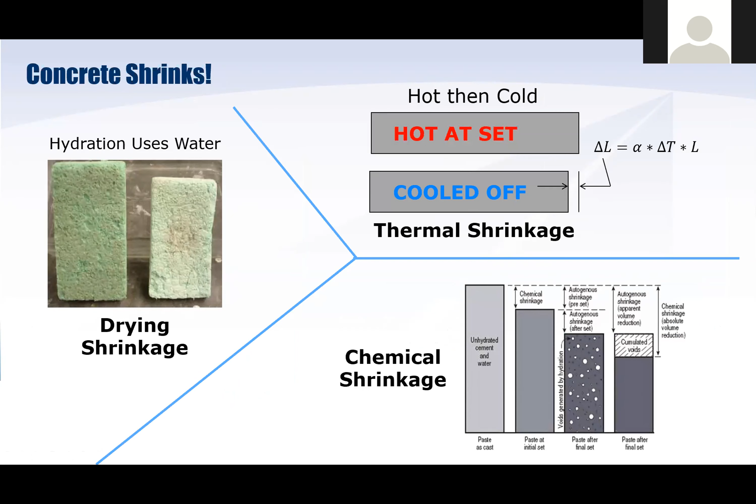So with that, we'll jump right in and talk a little bit about why we joint concrete. Why do we joint concrete pavements? The biggest reason, the one that's most prevalent and comes to mind most often, is that the concrete shrinks. So when we place concrete, through a few different mechanisms—whether it be drying shrinkage, thermal shrinkage, or chemical shrinkage—the concrete wants to shrink. And shrinkage itself is not the problem.

So if we had our fresh, hot, moist concrete, as it begins to cure and harden, it wants to shrink. Now if we were placing concrete on something frictionless, it wouldn't be a problem, but we place our pavements on a subgrade and subbase, and that provides restraint. That restraint wants to stop the pavement from shrinking, and as it builds, it builds stresses within our pavement, and the concrete wants to crack to relieve that stress.

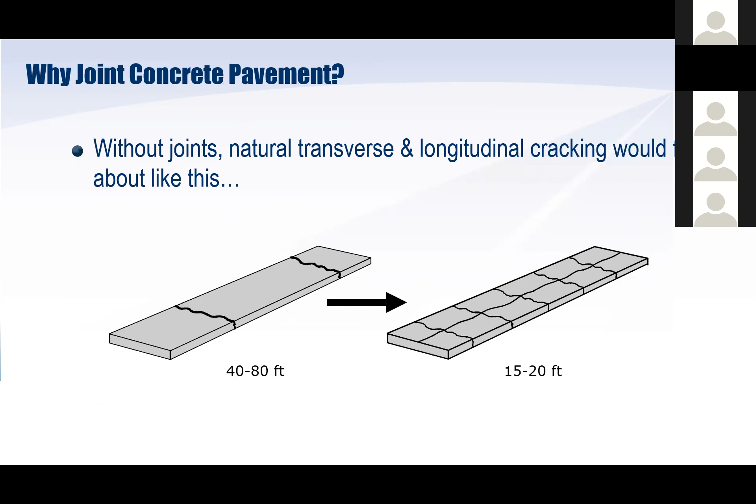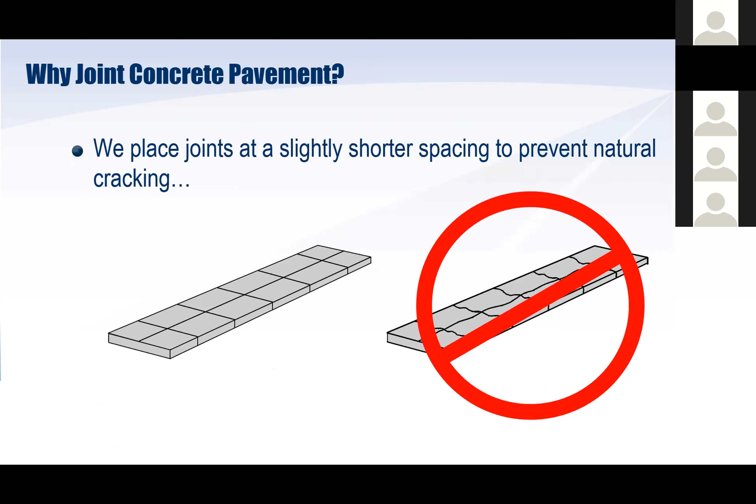If we didn't do any type of jointing, over time we would get a crack every about 40 to 80 feet in a transverse direction, and that would progress down to about every 15 to 20 feet over time. Since cracks are things we see and think our pavement has failed, when really they're just a natural thing that happens, we want to provide a place for that crack to happen that's easier to maintain.

That's one of the biggest reasons why we joint our pavements. Now some other reasons: we want to be able to divide these pavements into constructible lanes. If we were paving, say, 48 or 50 feet wide, it's hard to find a paving machine that could do something that wide in one pass. So we would want to pave 2 lanes at a time and then come back and put a shoulder on, likely in multiple passes. We have to divide the pavement into construction lanes and increments.

Additionally, we have to accommodate slab movements. Once those cracks initiate, the slab is going to continue to expand and contract through the life of the pavement, with thermal cycles and moisture cycles. It's going to keep expanding and contracting, and that's normal. Additionally, those slabs are going to curl and warp - we're going to talk about that in just a few minutes - and we have to accommodate that and decrease the stresses associated with it.

Additionally, we have to know where to put load transfer devices. If we're going to have significant truck traffic, we want a smooth pavement, so we're likely going to need dowel bars within our pavement. Mark's going to talk about dowel bars in a bit, but we need to know where those go, so that's why we have to know where those joints are placed. And if we're sealing our joints, we have to know where that seal needs to go, so we have to provide that sealant reservoir as well.

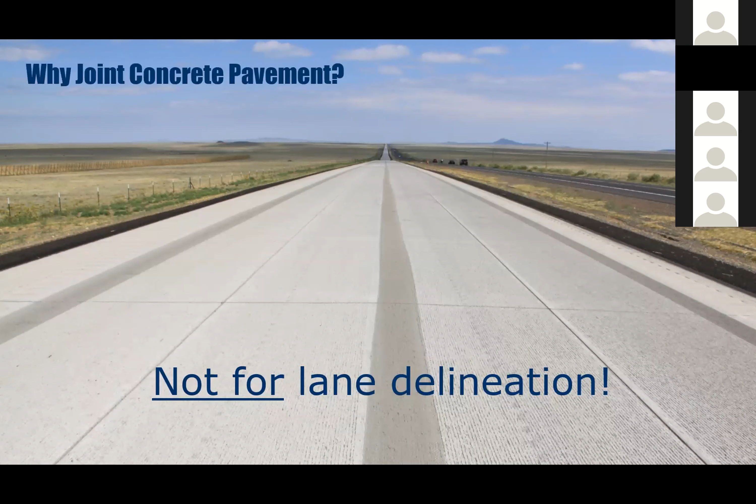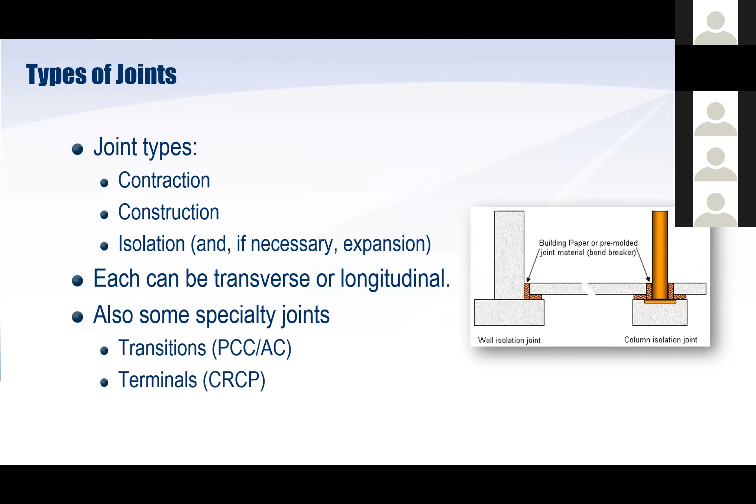Okay, so let's talk about the different types of joints in our concrete pavement. The main types that make up about 95 to 98% of our concrete pavement joints are contraction joints, construction joints, and isolation joints. Those three really make up most of our concrete pavement joints. All of those can happen in the transverse and longitudinal direction, and they're very important to consider. We also have some specialty joints, mainly transitions from concrete to asphalt, or concrete to a bridge, or a terminal joint at the end of a concrete section.

So we'll talk about each of these fairly briefly. First are our contraction joints.

Our contraction joints in the transverse direction are typical sawed joints. When paving a long tangent section, we have to saw in our transverse joints to cut down to about a 15-foot joint spacing range. These can either be doweled or undoweled, where we have aggregate interlock. The dowel provides long-term load transfer, while aggregate interlock may be okay if we don't have a whole lot of truck traffic.

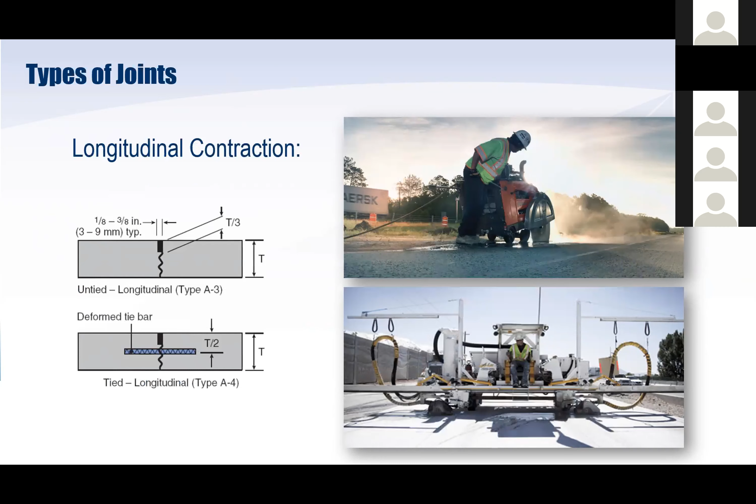Similarly, we can have a contraction joint or sawed joint in the longitudinal direction as well. If we're paving, say, 24 feet wide, we would likely want to cut that down to about 12 feet wide. So we would saw a joint in there, a longitudinal contraction joint, and these can have a tie bar or they can be untied, as you can see here.

The next type of joint is our construction joint. You can see a few different examples of these, but our construction joints typically have a flat face to them, and there are a few different ways that we can do this.

Our construction joints are almost always going to have a dowel bar in there, because we don't have aggregate interlock to transfer load from one slab to the next. So we almost always have a dowel bar as a mechanical load transfer device within our pavement. Occasionally you'll see a tie bar section in there, but a lot more often we'll see a doweled section or a dowel bar at these types of joints.

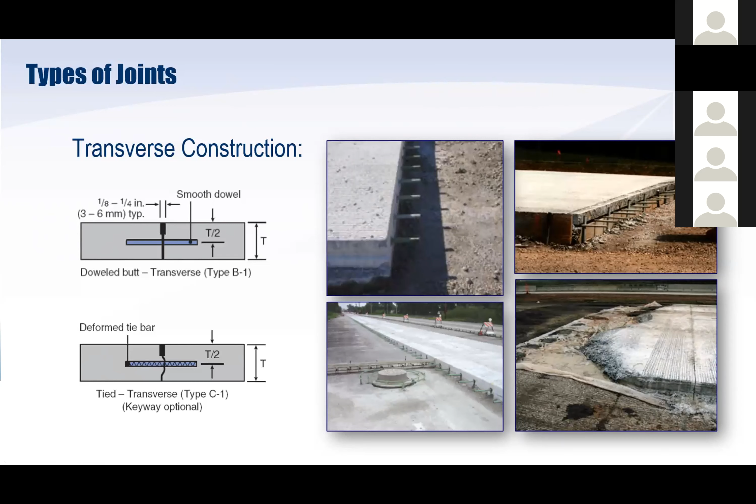There are a number of different ways we can do these header sections or transverse construction joints. You can see here where we're doing a fair bit of handwork, where we're actually doing a formed header. You can see we've already got our dowel bars in place, and they're doing a lot of handwork to get that formed header going.

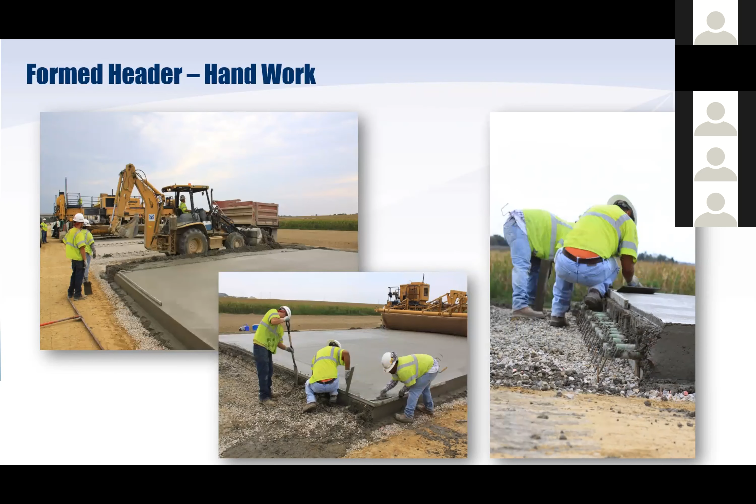Now, these happen at the end of a day's placement, where we're finishing off for a day, and we're going to start the next day's paving right there, right at that header. So there, you can see what a formed header looks like.

For a formed header, there are a few different ways you can do the dowel bars. You can have them already in place, as we saw there, or we can have dummy dowels or false dowels, where we would slide the dowel bar into a slot that's already created to make sure we have good consolidation around that dowel bar. This usually requires a fair bit of handwork as well.

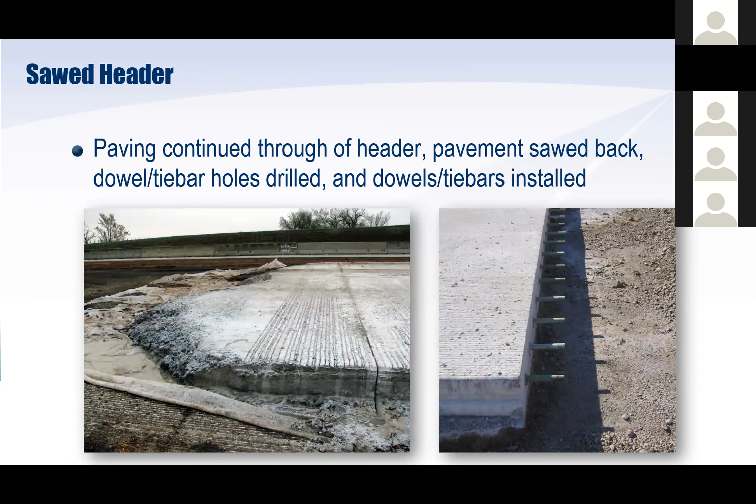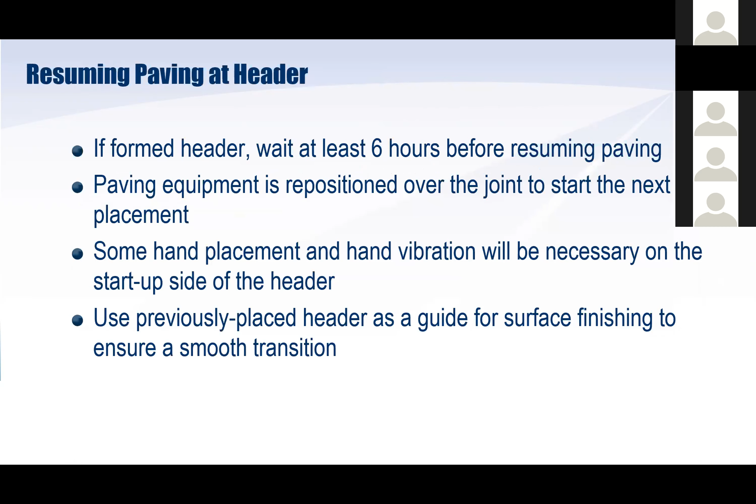Now, when we resume paving at these transverse construction joints or headers, we want to make sure we wait at least 6 hours, so that existing section has time to set. When we're ready to start on the other side, we'll have some handwork to do when we start that section up, making sure we get good vibration so we consolidate our concrete on that leave end of the construction joint. So it takes a little bit of work, but they do perform pretty well.

So our next type of joint is our longitudinal construction joint. These types of joints happen in between paving lanes. So we pave one section of concrete, and then we have to come in and pave the section just adjacent to it. Most often, we're going to see that these sections will be tied together with a tie bar. The tie bar is really just there to make sure that joint doesn't open up and keep these two sections of concrete together.

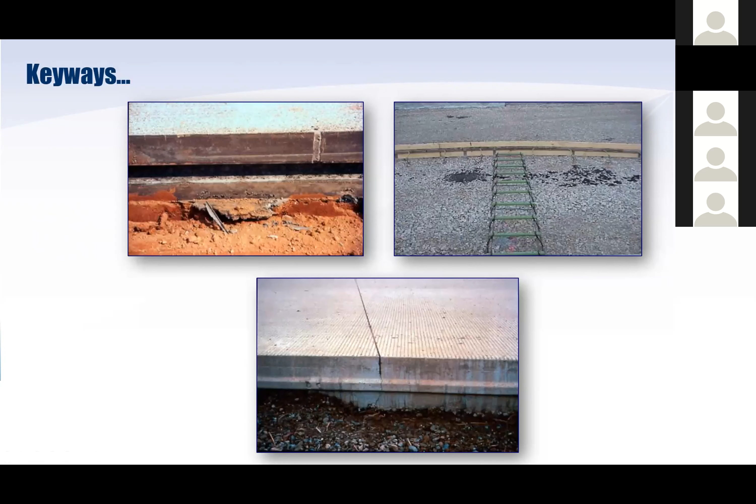Now, one thing with our longitudinal construction joints that I always like to mention is the use of keyways. Keyways are this idea where we have one section of concrete in a paving lane that fits into another and provides a smooth load transfer from one section to the next. However, with these conventional keyways, we've seen it's a relatively high risk of bad construction, where it can be kind of hard to consolidate that concrete in those sections that jut out a little bit. It can happen on both sides of that keyway. So we don't really recommend this conventional type of keyway much anymore.

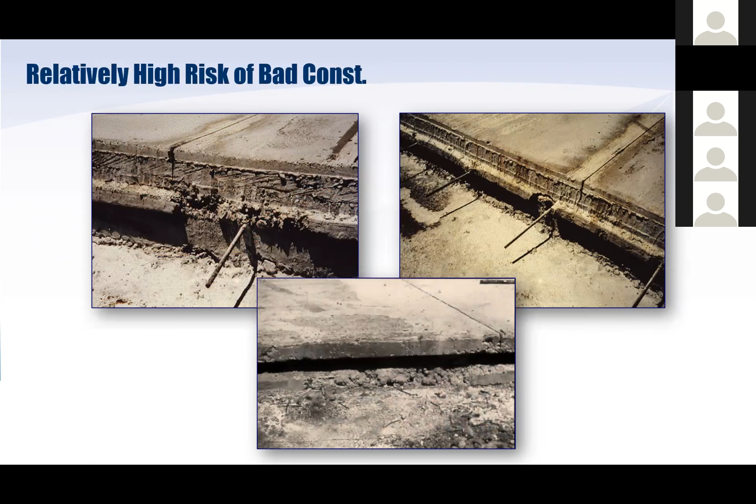Additionally, even if it is constructed properly, we can see that this section here and this section here can actually shear off, and then you get a little gap in between your two sections of concrete. So we don't really recommend this type of keyway anymore. There is a new type of keyway that's more of a sinusoidal section, but it hasn't really caught on in the US. So just a mention of that.

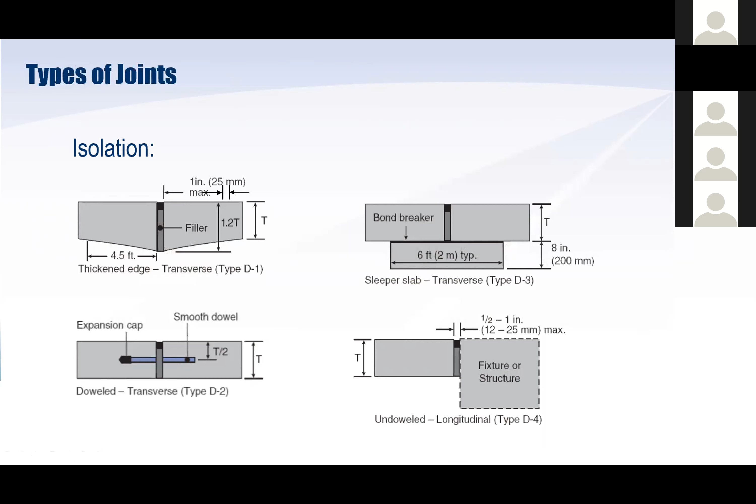Our last type of joint is an isolation joint. And an isolation joint is exactly what it sounds like—we're trying to isolate one section from another. We can do that a few different ways: we have a sleeper slab section, a thickened edge section, and then a doweled isolation, or in this case, it could be called an expansion joint. The idea is to make sure that one section of concrete is not influencing another, or if we're paving up against a structure or any type of drainage facility, this will make sure those two don't interact either in a horizontal or vertical direction—make sure we're not influencing our pavement, and our pavement isn't influencing that structure. You can see what that isolation joint looks like over here. It's usually about a half-inch or half-inch to one-inch filler board to isolate the two sections.

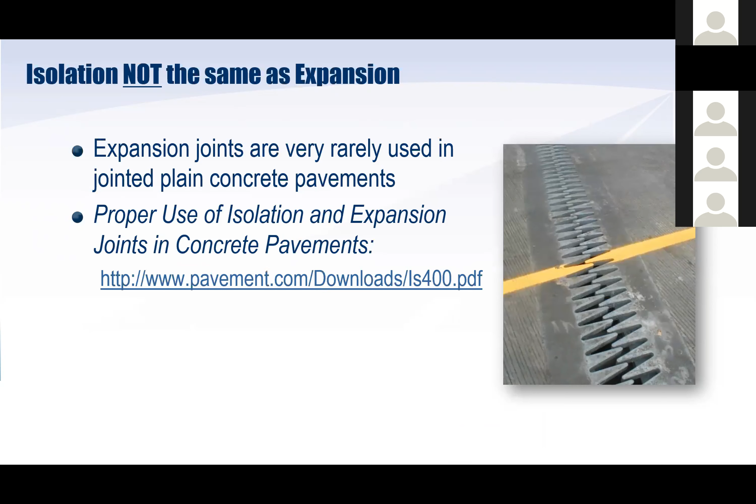Now, most often when we talk about isolation joints, we're not talking about the same thing as an expansion joint. Expansion joints are really more used on bridge sections. So there is a document that talks about the differences between isolation and expansion joints and when they're appropriate. That's another free resource as well.

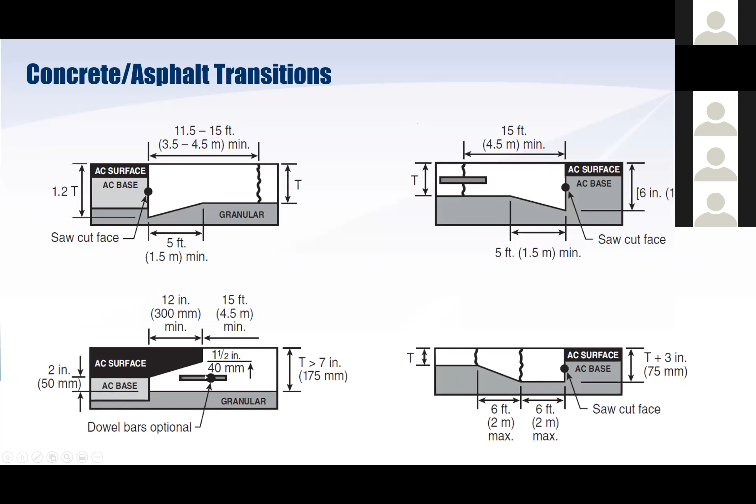So our last types of joints are those specialty joints. Really the main ones you would encounter are the transitions from concrete to asphalt, and you can see what a few of those look like here. Most often we're going to use some sort of thickened edge to firm up that free edge of concrete and reduce the stresses there, making sure we get a smooth transition from our concrete to our asphalt. You can see a few different options for that. Here we've actually got the concrete extending underneath the asphalt with a dowel bar there to help transfer the load and have that smooth transition from concrete to asphalt. If we do it well and construct it well, we can get a nice transition from that asphalt to the concrete section that can last a long time.

Okay, so that's a little bit on our types of joints. Next thing we got to talk about real quick is our panel length, our aspect ratio—what's that maximum joint spacing that we want to think about when we start getting into our joint layout for our concrete pavement?

When we start thinking about maximum joint spacing, the thing we always want to consider is curling and warping, because these slabs are going to have that curling and warping stress from the moisture, from the heat. All of that's going to influence the stresses in our pavement.

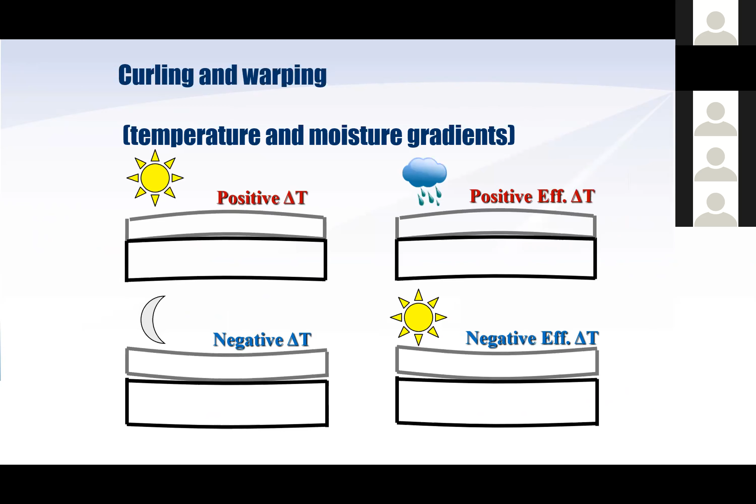We can control that when we control the size of the slabs that we have. By reducing the size of our slabs, we can reduce those stresses and control how they're going to impact our pavement's performance. You can see here a good introduction of what happens when we start cutting our panels in half, basically.

This is something we do a lot more in concrete overlays, where we go to shorter and shorter joint spacing, down all the way to 6-foot panels. But really the idea is consistent, that if we can control the size of our slab, we can control these curling and warping stresses.

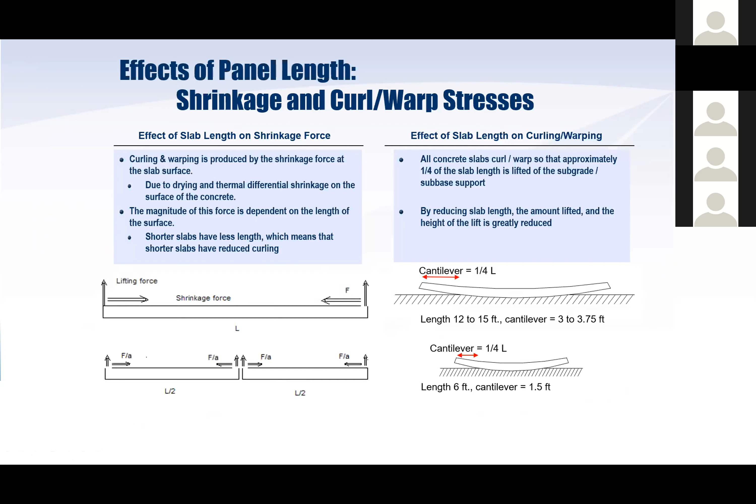So on overlays, when we cut these slabs shorter and shorter, and we have, say, 6-foot by 6-foot joint spacings, you can see we get one load on each slab. It can perform pretty well. We see it work really well on overlays. In some countries in the world, they actually use this on new construction as well.

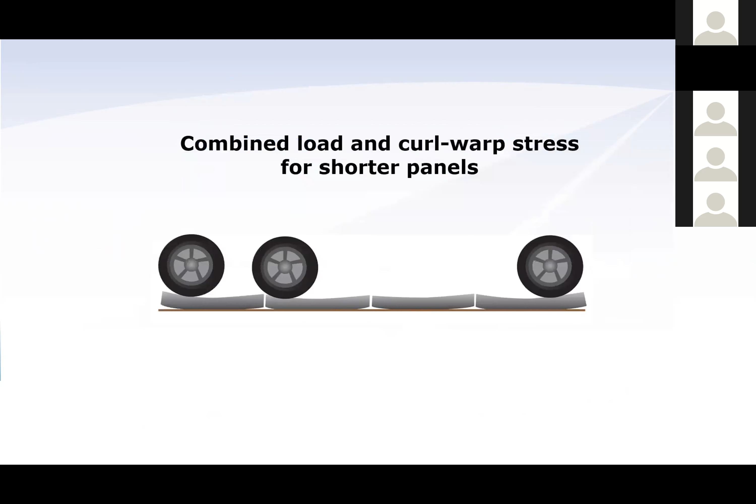That's one of the biggest ways that we control the stresses and the cracking within our pavement, by controlling the joint spacing of our concrete. So we want to consider that when we're thinking about what our joint spacing should actually be. Pavement ME, or Mechanistic Empirical Pavement Design Guide, is a great tool for seeing how that influences pavement performance over time.

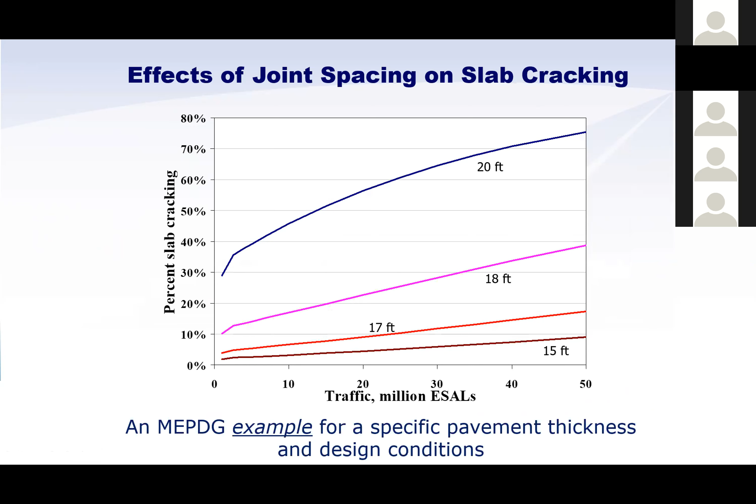We're going to cap that at 15 feet. We don't really want to go beyond 15-foot joint spacings. This should be illustrated by that graph we just saw a couple slides ago.

Additionally, we want to maintain an aspect ratio less than 1.5, which means that if we had a 12-foot wide slab, we definitely wouldn't want to go beyond 18 feet in the transverse direction. Considering that, if we had a thinner slab, say 10-foot wide, we wouldn't want to go beyond 15 feet. Keep that in mind, especially as we go through joint layout for intersections where we may get some odd shaped panels.

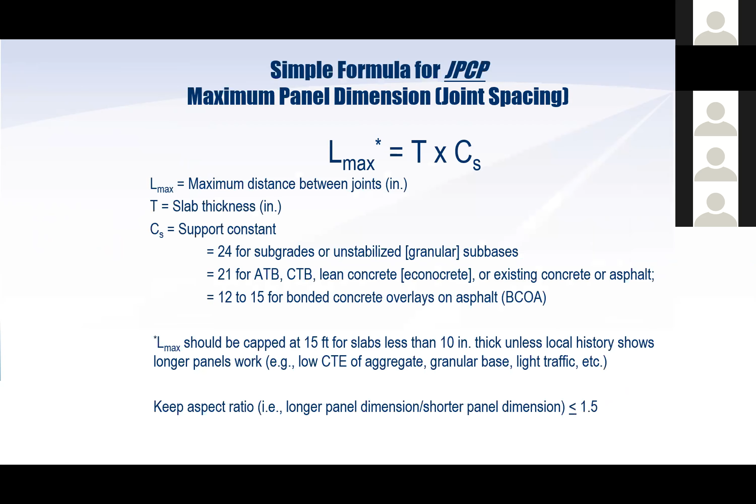Now there is an app for that equation. If you don't want to remember the support constants, this is a free tool from ACPA. You can find it on apps.acpa.org. It's the maximum joint spacing calculator. You basically just provide the thickness of your concrete and then choose what type of support system you have underneath the concrete. It'll give you your recommended maximum joint spacing.

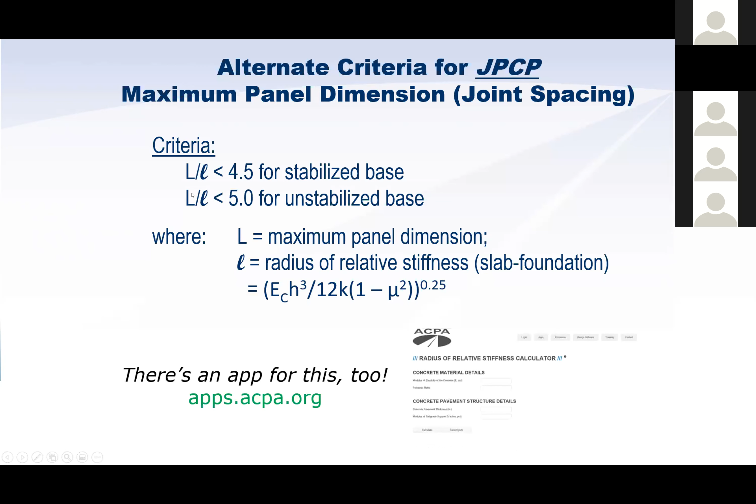Another way to do this that's been used before is by considering the ratio of the maximum joint spacing to the radius of relative stiffness, which is kind of defining your slab foundation. By limiting this ratio of joint spacing to radius of relative stiffness, you come up with similar numbers, but it's a little more mechanistic than that empirical approach we saw on the previous slide. There's another tool that can help with this as well: the radius of relative stiffness calculator. It'll calculate this little l for you, and then you can calculate your big L, or maximum joint spacing, based off of these relationships.

Now that we know our types of joints and a little bit on our aspect ratio and our layout considerations, we can go into joint layout for intersections. This is where we spend a lot of our time talking when we're thinking about jointing concrete pavements, because our geometries start to get a little funky and we have some odd shaped panels that we have to deal with as best we can. That's what we're going to try to do here in the next 10 minutes.

The things to consider for intersections: we want to consider the thickness of both roadways as we approach, we'll see that in just a second. We want to consider the jointing spacing, which we just talked about with our aspect ratio and maximum joint spacing. We want to consider the layout, which is what this methodology is really built for. But we also want to consider maintaining traffic. We're going to phase this intersection and try to maintain traffic and construct the intersection under traffic. We need to consider that up front as designers such that it's actually constructible. And then there are a few other considerations as well.

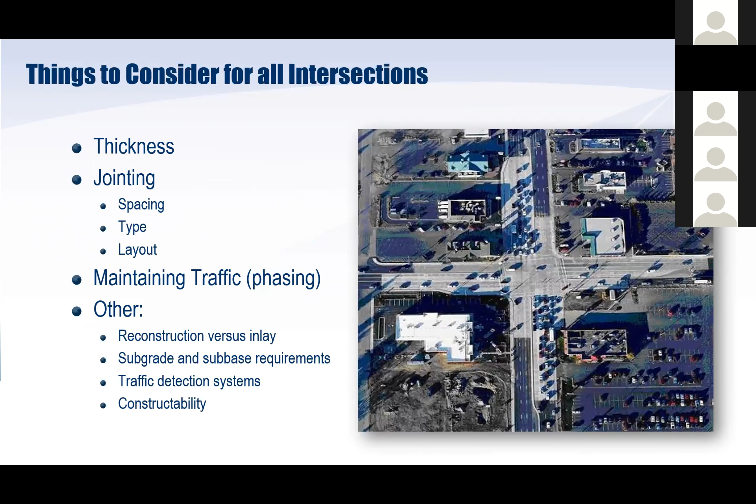When we're thinking about thickness, the biggest thing to consider is the physical and functional areas of the intersection. As you can imagine, we've got two roadways worth of traffic, so here we're going to see an increased volume of traffic relative to either of the roadways. So one of the considerations is, do we need to thicken up the section of concrete to accommodate that extra traffic? Here are a few simple guidelines to address that.

If we have two roadways with low traffic, we likely just take the thicker of the two roadways. If we have one roadway with low truck traffic and one roadway with high truck traffic, we would again take the thicker of the two sections. But if we have two roadways with high truck traffic, we may want to add a half inch to an extra inch of concrete within that functional area to accommodate the additional truck traffic that we're seeing within that intersection.

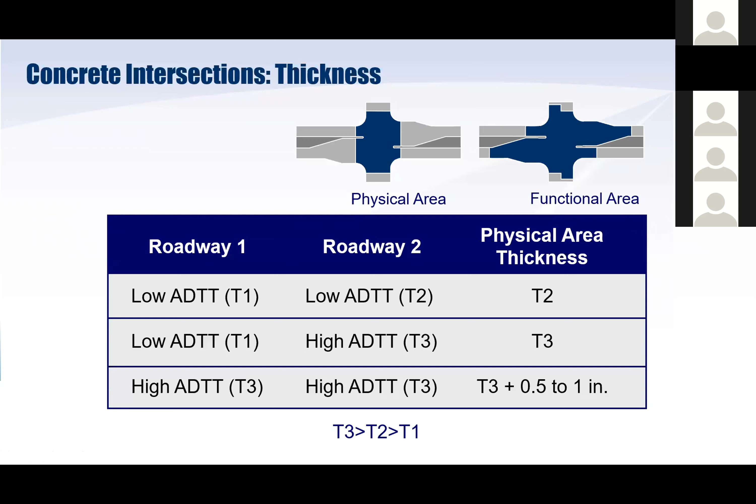Now when we're laying out our joints and thinking about joint spacing, our best practices, the five things we always want to consider as we go through this 10-step process: keep it short, we want our panels roughly shorter, which helps reduce the stresses within our slabs. We want to keep them as uniform as possible, we don't want so many different geometries that it becomes hard to construct. We want to keep it perpendicular and roughly as square as possible, and keep this layout simple and practical for the contractor, because they actually have to build this section of concrete.

As we're going through these intersections, a few more things to think about. We want to match any existing joints and cracks in location and type. So if we paved a section of concrete and we're adding on to an existing pavement, we'd want to match, say, an isolation joint with an isolation joint, at the same location. Additionally, if that existing pavement has any cracks within it, we would likely want to match it with a joint there, because if we didn't, we would have sympathy cracking into our new pavement. So we're matching our joints in location and type, and matching cracks as well.

Cutting joints at the proper time and depth gets into the construction of these things, it's a little more detailed on that side. We also want to place our joints to meet in pavement structures, and we'll see that when we get close to the end of the 10-step method. Consider that maximum joint spacing that we just talked about. We'll talk about isolation joints as well.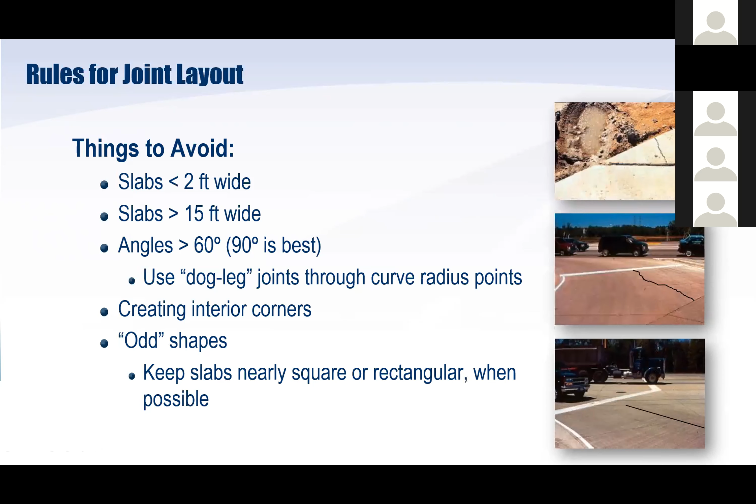So we've got some rules for joint layout. Let's actually go through a joint and intersection using this 10-step method, step by step. I'm going to go through this fairly quickly, but one of our free resources is focused solely on this 10-step method, so I'd encourage you to download that if you're looking to do a joint layout for an intersection.

Our 10-step method for intersections starts with drawing all pavement edge and back of curb lines, so we start off with our bird's eye view of the pavement. Step 2, we lightly draw circumference return, taper return, and crossroad return lines—offsetting these return lines from our edges of pavement. This reduces the sharp corners we'd otherwise see if we didn't follow this methodology.

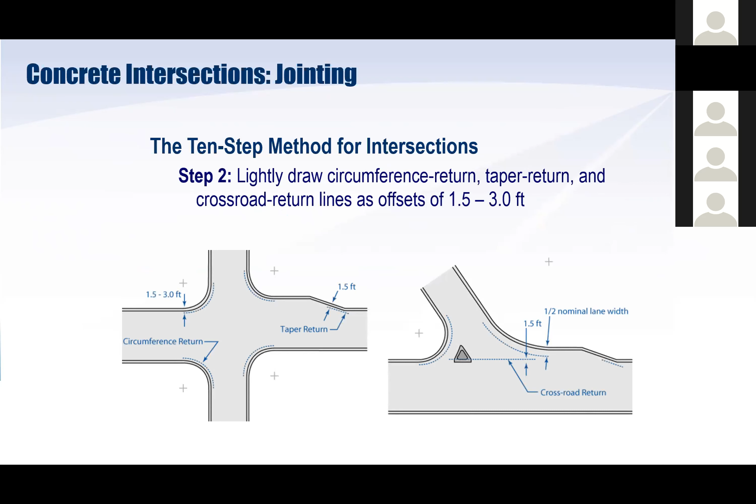Step 3, we draw all lane lines on the main line and crossroad, not extending through our return lines yet. We stop when we hit those return lines, but we're starting to see what our joint layout may look like. If we have a skewed intersection, the crossroad return line is really the only one we're crossing, but we cross it such that we're perpendicular to our direction of travel on the crossroad.

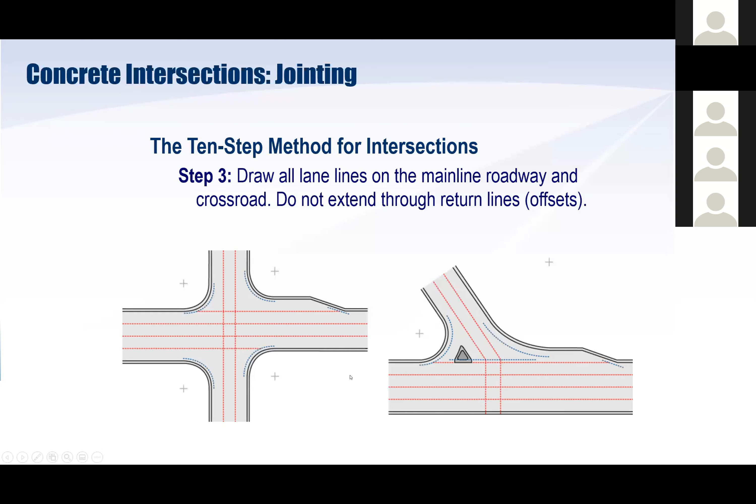Step 4, we start thinking like a contractor—how would a contractor actually get in here and maybe use a slip form paver to pave these sections? This can increase productivity for the contractor and also reduce the cost of the intersection. It may not be exactly how a contractor would construct it, but it's a good way to consider how this section would be paved.

Step 5, we start adding our transverse joints. The first transverse joints we place are at any pavement width change—anywhere the pavement width is changing, we add a transverse joint. So at the edges of those circumference return lines, we're adding transverse joints even if they don't match up, as you can see here and here. And wherever there's a kink, say for a right turn lane, we're adding transverse joints too.

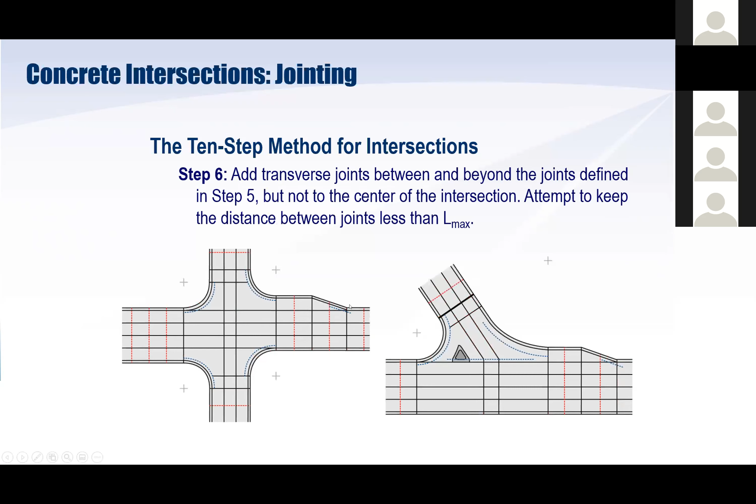Step 6, we start adding the transverse joints outside of the center portion of our intersection. Again, we're considering our maximum joint spacing, trying to keep this as uniform as possible. So if a distance is greater than our maximum joint spacing, we're adding a joint, trying to keep things as uniform as possible.

Step 7, we start to get into the inner portion of our intersection, laying out our joints in the form of an intersection box. We're defining this box by extending our edge of pavement lines into the intersection. We're still not crossing our taper and circumference return lines—that's where we stop this intersection box. You can see we're just about done with our joint layout.

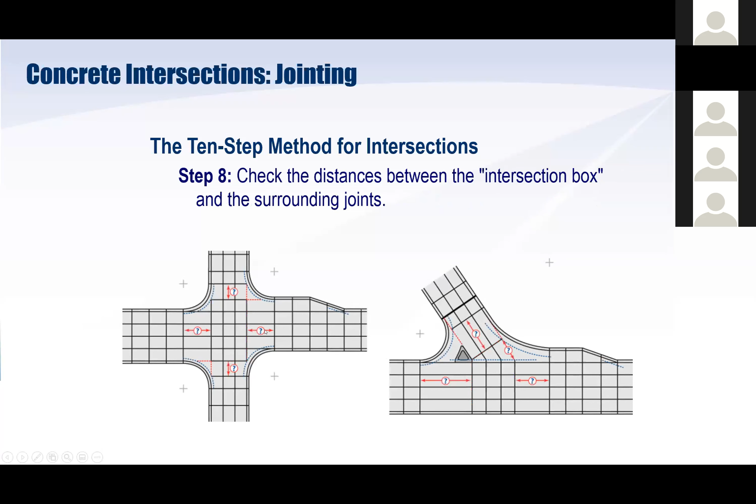So step 8, we check the distance between our intersection box and our next transverse joint. If it's greater than our maximum joint spacing, we need to add a couple more joints. That's what we'll see in step 9, where we add that transverse joint. You can see here on the north and south sections of this intersection, we didn't need that extra joint. On the east and west, we did need an extra joint between the intersection box and the other transverse joints. So you can see here our joint layout's looking pretty good.

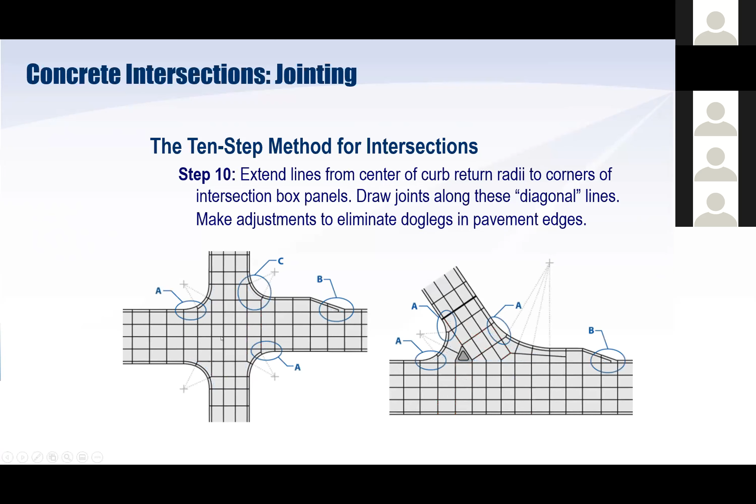The last step, we have to deal with some cleanup and deal with those odd-shaped panels. Notice that this whole 10-step method is really getting those odd-shaped panels out of the center portion of the intersection and trying to minimize their impact on the design as much as possible. So you can see a few different ways of doing that. We have these details blown up a little bit as well on what they should actually look like to improve performance as best as possible, how to deal with incorporating that into the curb and gutter section as well. So a few different details that are really helpful in this type of design.

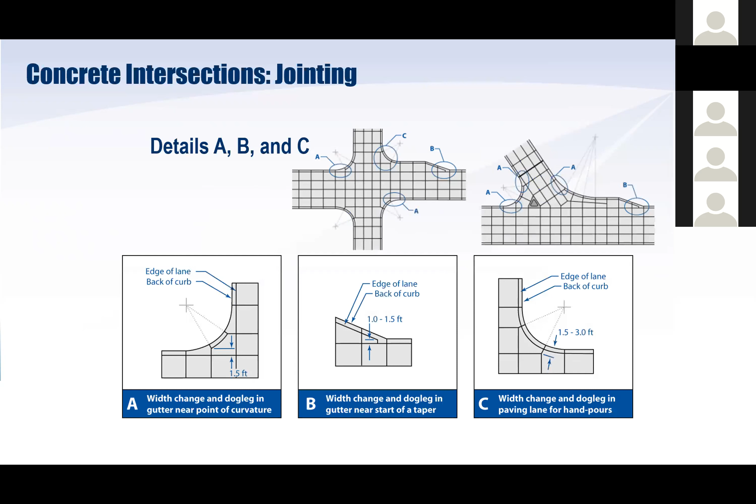So a couple details that I do want to mention. When we have some of these sections, we may run into a scenario where we have a dead end joint. You can see what that looks like here, where we have a longitudinal joint that kind of just stops. That has to happen because otherwise we would have a really small, sharp panel that would likely crack. So if we have a dead end joint, there are a few different ways we can deal with that.

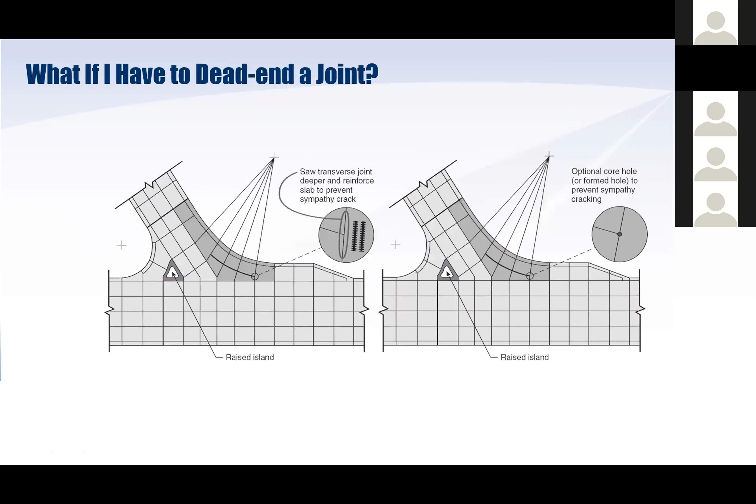We can either put rebar where that joint stops. That makes sure that if we get a sympathy crack into this next panel, that crack remains tight and doesn't propagate. Or we can put a core hole at the end of that joint, and that'll make sure it doesn't propagate into the next slab as well. So if we do that core hole or formed hole option, this is what it would look like in construction. After construction, you can see what that looks like, where we have this hole, which would be backfilled with any type of repair material that we would use. That'll make sure that we don't get that joint propagating into the next slab.

So the last thing that we really want to consider is our utilities and our drainage sections as well. We need to adjust our joint layout for those utilities that are in our pavement. We want to adjust our joints to meet those objects with a joint. If we don't do that, we can run into some issues. So we have box outs in here. See what some of those look like with optional reinforcement. If we have a telescoping manhole, that's the one thing that we don't need to isolate from and adjust our joint layout for. That'll perform just fine.

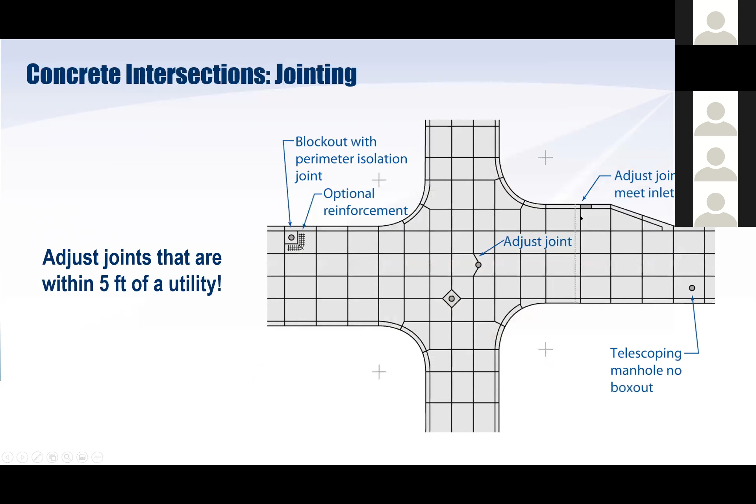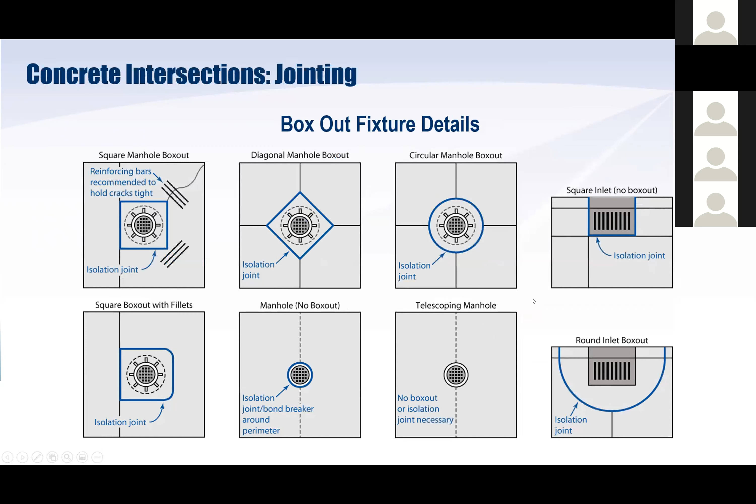But if we have a drainage inlet, you can see adjusting those joints just a little bit will definitely improve our performance. So a few different box out and fixture details—you can see here what some of those will look like. A lot of times we're isolating around those structures, and this will help performance of our pavement. So if we do it correctly, you can see what that looks like. If we box out appropriately, these are fairly old pavements and old pictures, and you can see our performance is great. We don't see any cracking.

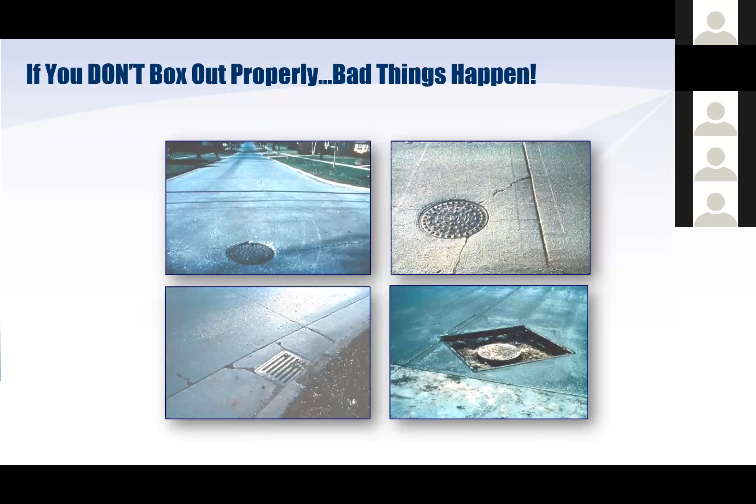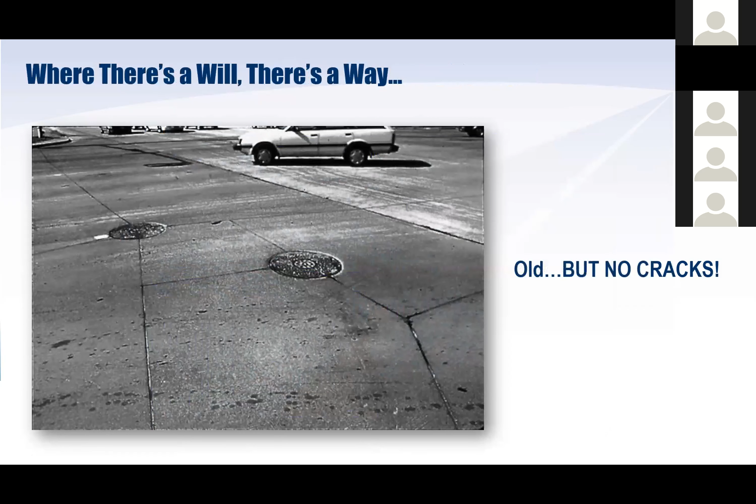If we don't box out properly, you can see here we can get some significant cracking that can deteriorate our pavement fairly quickly. In a lot of these situations, if we had just considered it in our jointing plan, say adjusted this joint to meet that manhole, we would see a lot better performance than what we see here. So where there's a will, there's a way. You can see that we may end up with some weird looking things, but you can see here, we're not cracking. We just have some odd joints laid out, and it performs pretty well.

So good practice on the contractor side, especially when we get into those curved sections, is laying out a stake and actually providing something for our sawing crew to actually saw those joints to.

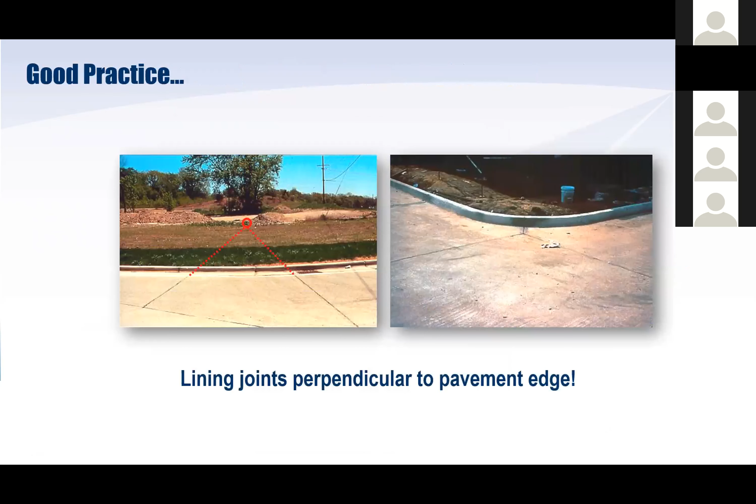We'll make sure that we get those joints laid out where we want them to be. The last thing I want to mention is the isolation joints. These are a lot of times used when we have a T-type intersection or a skewed type intersection, and this makes sure that this section of concrete does not push into the central portion of our intersection, building up stresses.

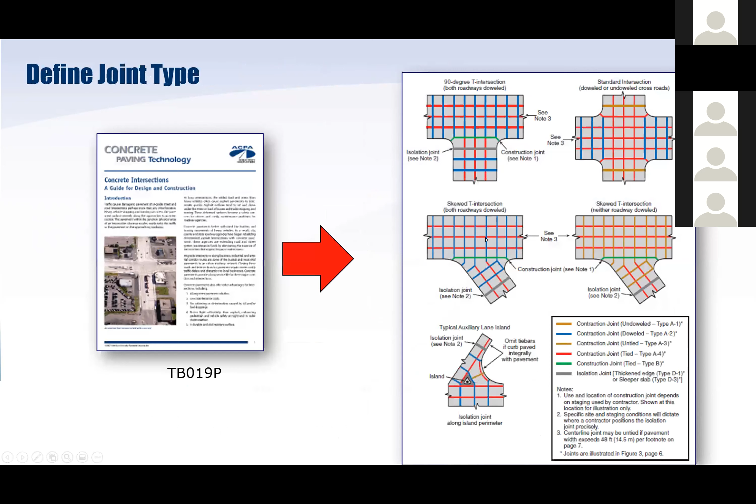There's more detail on that in the resources provided. The guide to intersections really goes through a lot of this as well. And when we're laying out these joints, this is kind of what a contractor is going through as well to determine what their bid price would be for doing all of this work. So it's something that's helpful for them as well.

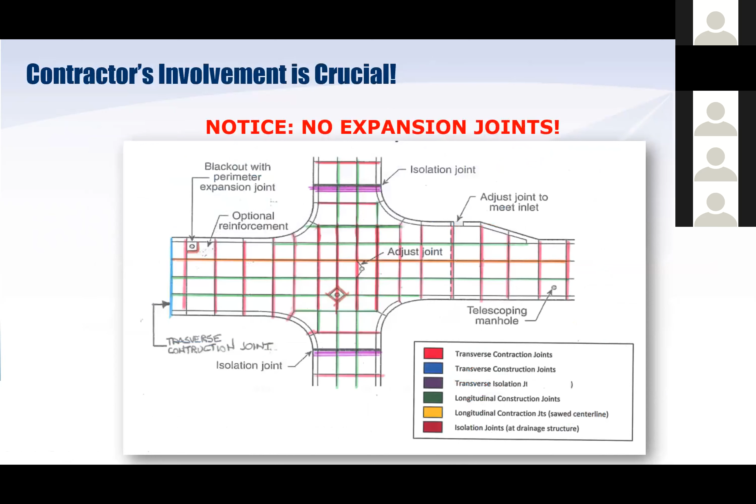Dowel bars, of course, are a very critical structural component of jointed concrete pavement. These are smooth surfaced steel bars, typically steel, sometimes other materials, and they are smooth surfaced so they allow the joints to open and close in response to temperature and moisture changes, thereby preventing uncontrolled cracking from taking place in the panels at places where we have not cut joints.

Also, very importantly, they provide load transfer. They carry the load from one slab into the next, and in doing so, they reduce the deflections of the slabs. If you reduce the slab deflections, you also reduce the potential for erosion of support, erosion of the base layer, the sub-base layer, or the foundation material. If you reduce the slab deflections, you also reduce the slab stresses.

So we share the load across the joint. Only a fraction of the load is carried by each panel on either side of the joint, and therefore you have only a fraction of the stresses on either side.

They also serve to provide some restraint of curl warp deformation. Now, that restraint, anytime you restrain a pavement from doing what it wants to do, you induce a stress. So we need to be aware of that, but what it does do is improve our ride quality. If we have dowel bars and tie bars across our joints, we tend to see less movement of those slabs, less curling and warping than we would otherwise see if they were not there, and therefore our ride quality should be higher. Our ride quality is also higher because the dowel bars prevent faulting from developing, and that also influences the IRI value or other ride quality value.

In terms of an illustration of the deflection effects, we can look at an interior deflection, D sub I, meaning the deflection of the interior of the slab. On the left-hand side, we have an undoweled transverse joint situation. At the corner, if we don't have dowel bars, we have a free edge at the outside lane, and with an undoweled joint we may have as much as 5 times the deflection of the interior of the slab at that corner location.

The interior corner, where we've got some aggregate interlock along both the transverse and longitudinal joints, is still approximately 3 times as high as the center slab deflection. If we go to a doweled joint condition, the outside corner is still higher than the center, but we've reduced it by about 60% from the undoweled condition. Similarly, the interior corner condition, instead of being 3 times the interior, is now only 2 times the interior. So dowels are very effective in reducing those deflections.

We often talk about deflection load transfer or relative deflection of joints as measures of joint efficiency, of how effective our joint load transfer system is. These are two different competing concepts. Load transfer efficiency, based on deflections, is commonly the ratio of the unloaded side deflection divided by the loaded side deflection, multiplied by 100 if you load one side of the joint. That's one of the more common definitions, though there are other definitions as well.

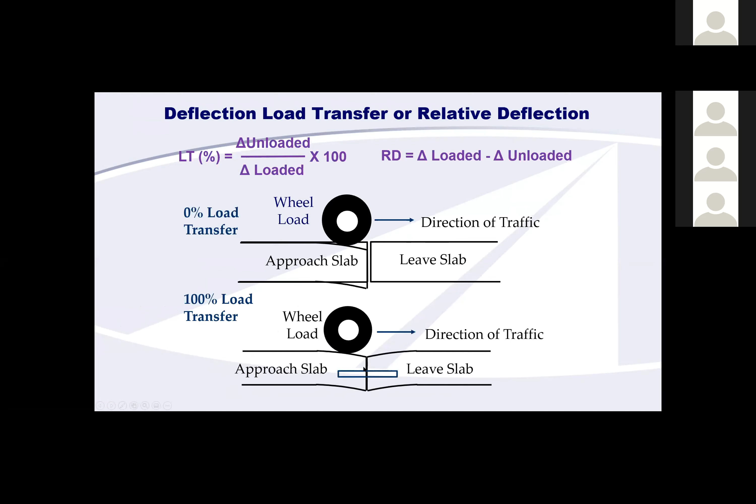With a dowel bar retrofit or repair, we know exactly where the joint is relative to the midpoint of that dowel bar. So we see a lot of folks using shorter dowel bars - 12-inch and 14-inch bars are fairly common. I'd point out that Minnesota is one state that uses 15-inch bars routinely for all their construction.

Typical diameter is around 1 inch to 1.5 inches on roadway pavements, 1.5 to 2 inches for airports. How big that diameter is really varies more with the loads you expect to see on it, as well as the spacing of the dowel bars and the shape of the bars. And now that we've got FRP bars, it also depends on the material you have in place.

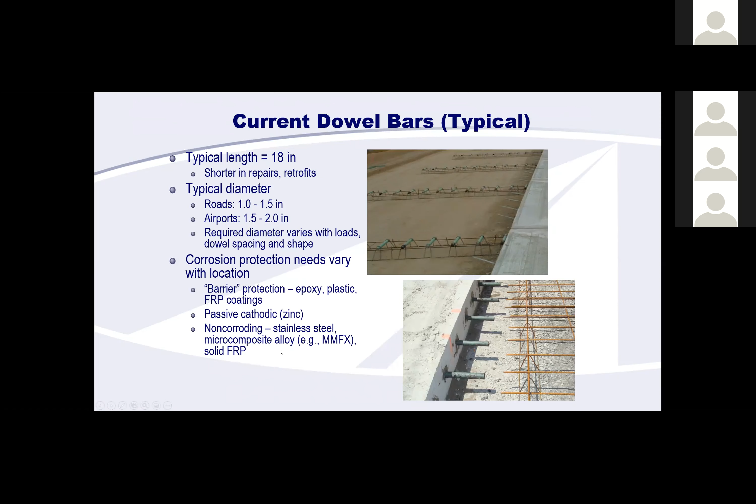Optimized dowel spacing. We used to use dowels every 12 inches all the way across the joint. If you had a 12-foot lane, you'd have 12 bars there. We're seeing a trend now towards what we'd call more optimized or more idealistic dowel spacings, putting the dowels where they are needed and also avoiding things that we know have caused problems in the past.

This is why we're starting to see the use of more like 11 bars in a 12-foot lane, so that we've got 1 foot clear between the outside bar and the outside of the paving shoe. What we found in the past is if we have that outside bar too close to the edge, sometimes the paving shoe will catch that bar and it may drag the basket, and then we've got a misalignment problem. And also if the bar gets too close to the edge and that bar carries a significant load, it might actually even cause a little bit of spalling right at the edge. So moving that bar in a little bit has been found to be very helpful.

We're seeing that taken to an even greater extreme by putting the bars where they're needed in the wheel paths. You see a picture here from the Illinois toll road with 5 bars per wheel path. Utah, for example, uses 4 bars per wheel path routinely. And the bottom photograph here is a picture of a 2-lane road in Minnesota where they did a dowel bar retrofit and put only 3 bars in the outside wheel path only. That's a photograph of a project that's more than 20 years old and performing very, very well with just those bars in the outside wheel path.

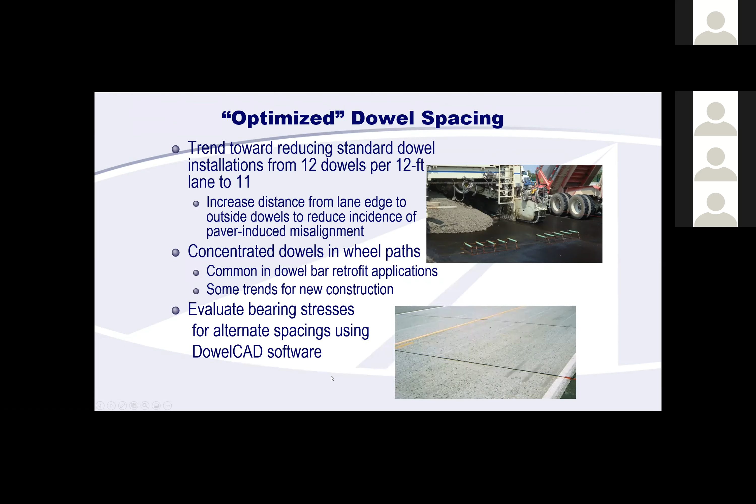You can evaluate these different spacings using DowelCAD software. This is another one that's available for free at the apps.acpa.org website that Eric was talking about previously. It will allow you to compare conventional configurations with alternative configurations and look at the impacts those have on dowel bearing stress and corner stresses in the pavement and so on and so forth. So it's a way to make the pavement more efficient using a little less steel, make it cost a little less, and still have very, very good performance.

In addition to having optimized dowel layouts, we also have some optimized dowel designs, with the object of the game being to try to reduce the contact stress or the bearing stress between the dowel bar and the concrete. If that bearing stress between the dowel and the concrete is too high, then the concrete that supports the dowel bar can degrade over time, and the dowel bar loses its effectiveness because it becomes loose within the pavement, and then you have higher deflections again.

Some of the examples we're seeing now, we've seen elliptical dowel bars where you have a dowel that's kind of an oval shape, a little bit flatter on the bottom, a little wider than it is tall. Taken to an extreme, we have plate dowels, which we see used extensively in industrial paving, indoor warehouse applications where they have relatively thin pavements and they want a thinner dowel bar. Then we see tubular dowels like the ones you see on the right-hand side here. These are tubular stainless steel, but there are a number of other tubular designs as well, epoxy coated over zinc, or just plain old epoxy coated steel tubes. These give you much less weight, more effective use of the material, though a slightly larger diameter to achieve the required stiffness.

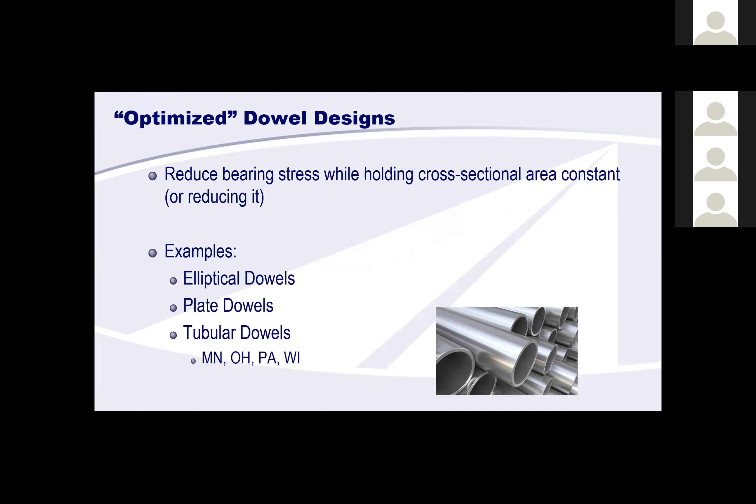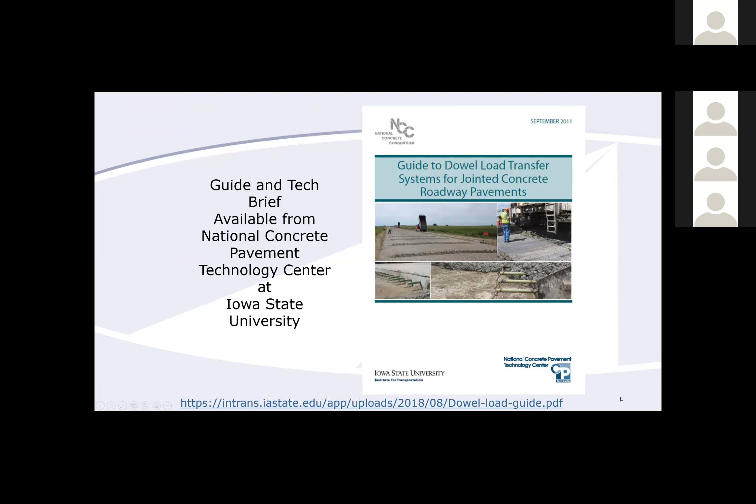Let's talk a little bit about tie bar system design. Eric talked a little bit about this earlier. We use tie bars as an important structural element.

Their main purpose is to hold the joints tight. They can assist in providing load transfer through keyways and aggregate interlock, and in doing so, they assist in providing the load transfer that's necessary for sharing the load across the joints.

It's my opinion that unless you use very, very large tie bars with comparable diameter and spacing to what you have for your dowel bars, they really are not providing a great deal of direct load transfer. But that's okay, because we use dowel bars across transverse joints, since that's where every wheel load crosses. We don't typically see a lot of wheel loads running right down the longitudinal joint. Obviously there are a few now and then as a truck passes from one lane to the next, but typically our wheels are running 1.5 to 2 feet away from those longitudinal joints, and we don't need the tie bar to serve as a load transfer device.

If it did, you would have very high bearing stresses, because the typical diameter on these bars is much smaller than what we have in dowel bars. They also provide a little bit of restraint of curl and warp deformation, but again, these bars are not terribly stiff. They're not going to greatly reinforce that joint from rotating.

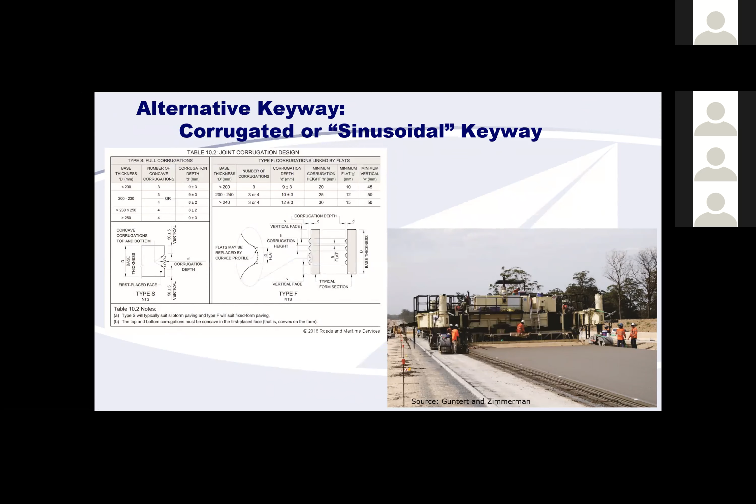When we come to tie bar design, a lot of states have unfortunately gone to a one-size-fits-all system, and one size does not fit all. We've seen some performance problems from using a standard design that might be, for example, number 5 bars at 30 inches everywhere. There are certain situations where number 5 bars at 30 inches works.

But if you have, for example, a relatively thin concrete overlay placed as an unbonded overlay on geotextile fabric, where there's very little friction in the underlying interface, that's a very different amount of force across that joint than if you have a 13 or 14 inch pavement on top of a cement stabilized base, where it may be bonding or interlocking with that base and there's a lot more force taking place. So you need different designs for these different situations.

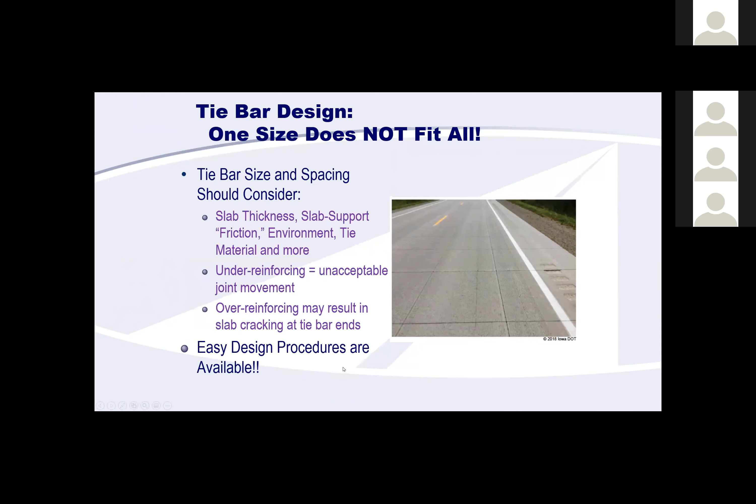So there are design procedures that are easily available. I know we like to try to make things simple for design and construction, but this is a place where we need to take a little bit more effort.

Even as early as the 1986, 1993 AASHTO design guides, if you're still using those on occasion, they're based on subgrade drag theory, the old theory that you need enough steel in the joint to offset the friction between the slab and the subbase based on the distance to the nearest free edge. The area of steel is equal to the tensile force developed, T, divided by the allowable working stress in the steel.

There's an equation for it, a pretty simple one based on the distance between the working joint and the pavement edge, the slab thickness, the unit weight of the concrete, and a frictional coefficient.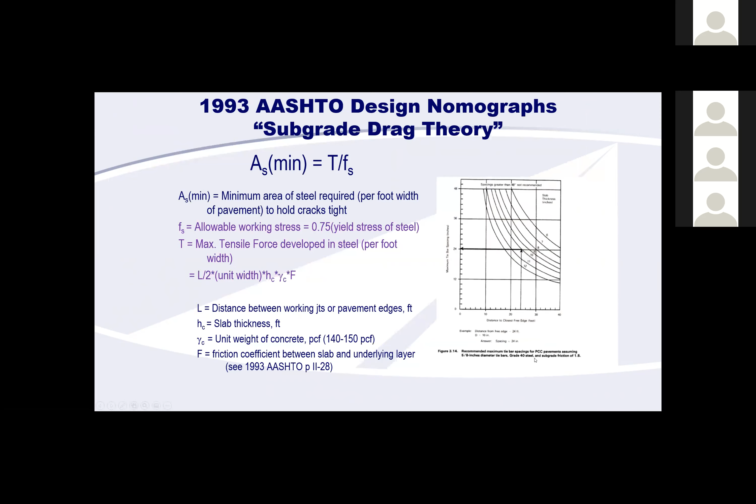We even have nomographs for certain situations, and you can develop your own pretty easily based on the grade of the steel, the assumed subgrade friction factor, and the diameter of the tie bar. You simply come in with the distance to the free edge, go up to the thickness of the slab, and come off to the side, and it tells you the tie bar spacing in inches for that particular set of conditions and grade of steel.

If you want to get more sophisticated, there's the mechanistic empirical tie bar design approach. This was developed by Applied Research Associates, I believe, for the Portland Cement Association back in the last decade or two, around 2009.

It takes into account where you are, the type of cement you're using, the cementitious materials content of your mixture, the coefficient of thermal expansion, the thickness of your slab, your lane configurations, how many lanes you're tying together, what type of base you're on, when you build it, how you cure it, and then it calculates a recommended tie bar size, spacing, and grade of steel, taking into account not only subgrade drag but also curling, warping, and other environmental factors.

This is another one of those tools available for free online at the apps.acpa.org website, this tie bar design calculator.

One of the last topics I want to cover is dowel bar alignment and location requirements. We could spend quite a bit of time on this, but we're just going to touch on it. If you have further questions, we can go through that in the Q&A. There are several different components to dowel bar positioning.

There's alignment, which deals with rotational movements or displacements of the dowel bar — we can rotate it horizontally in the horizontal plane, which we call skew, and vertically, which we call tilt. And we've got three different positioning errors: horizontal translation, where the bar is to one side or the other.

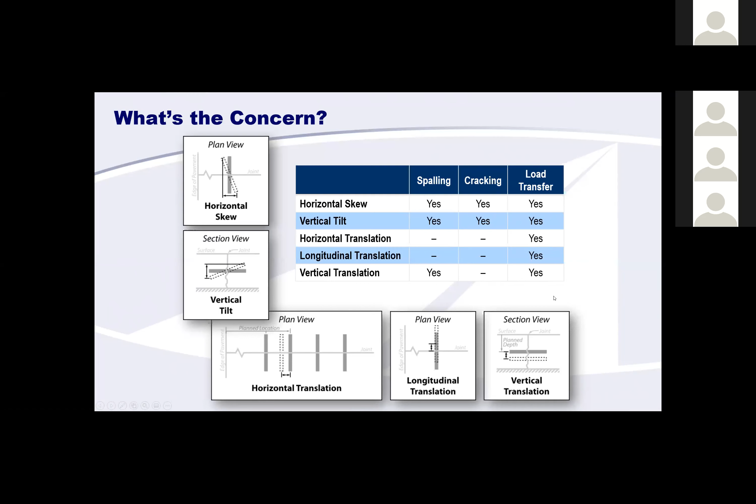I'm not going to go into this here, but ACPA did put out a very detailed dowel alignment and location guide specification about a year and a half ago. It provides updated guidance on calculating joint score, a means of assessing the potential for a joint to be restrained by dowel bar rotation, depending on how many bars are rotated and how badly they're rotated.

It has guidance on procedures for measuring dowel bar alignment — how many joints do you measure, how often do you do it for quality control purposes — and it establishes guidance on acceptance and rejection criteria, noting that those are different.

There's a target that you want to see, and you may not achieve that, but it may still not be to the point where you would actually reject it. You may have a pay factor adjustment or something, but there's certainly some point at which the bar is sufficiently mispositioned to cause you to reject that joint. You need to remove and replace.

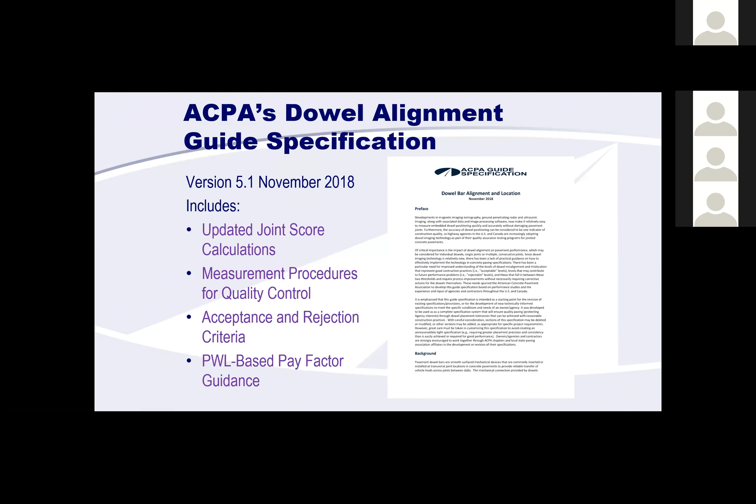It also provides guidance on percent within limits based pay factors, based on experience from states and provinces in Canada. So I would direct you in that direction for more information on dowel positioning.

In terms of dowel and joint construction, we can talk about placing the steel. If we have pre-placed steel in baskets and on chairs, we want to make sure that they are anchored properly. And there is, again, guidance out there.

This is an FHWA tech brief, written with the assistance from, or really the main authorship from, the American Concrete Pavement Association. Jerry Voigt and Eric Ferrebee, I believe, both worked on this. And FHWA put their stamp of approval on it. It provides a lot of guidance in terms of where to put the anchors, the types of anchors you need to use for different types of bases.

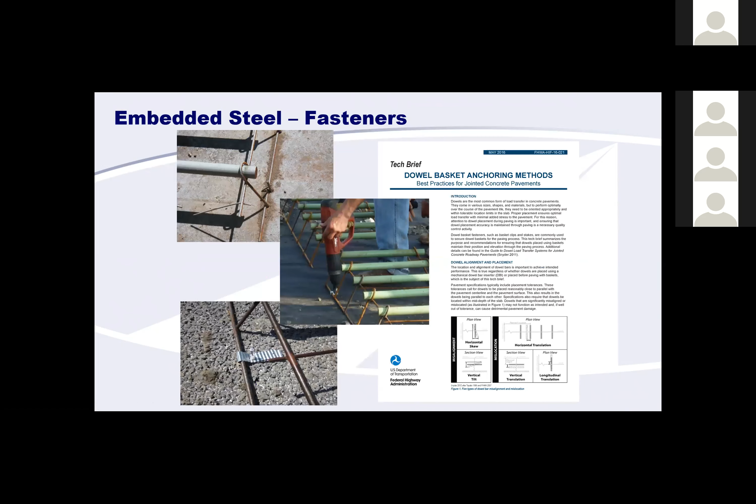And how many, where they need to be, which side of the baskets. Do you anchor the top bar, the bottom bar of the baskets? So all that information is in here, but it's very important, obviously, if we're going to place these things on baskets, that they stay in place as the paver moves across. This becomes particularly important now that we are often using a little stiffer mixes, a little rockier, optimized mixes that have more aggregate in them and less cement. So the anchoring becomes very important.

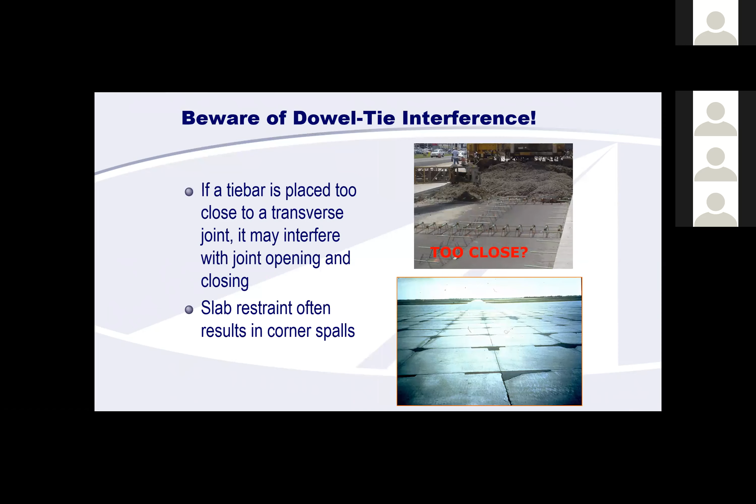So what we often will see done is that you'll skip a tie bar. As you can see in this operation, this is a dowel bar inserter behind this paver, and you can see they've got 4 tie bars in a row. Then they skipped one. That's where the dowels are going to be implanted.

Most states have adopted a guidance of holding the tie bars at least 15 inches from the transverse joints. That puts you at least 6 inches off the ends of an 18-inch long tie bar or dowel bar. And a lot of states have gone to using 30-inch distances to the joint, which puts you 21 inches off the end of a half of an 18-inch long bar.

In fact, the Federal Highway Administration Technical Advisory 5040.30, which was just released last year, says specifically tie bars should not be placed within 6 inches of the ends of transverse joint dowels, i.e. within 15 inches of the transverse joints, to avoid corner spalling and other potential interference effects. It goes on to say you might need to modify your tie bar spacing to get the right number of bars to hold the joints tight, but still avoid conflicts with the joint dowels.

When we have inserter placed steel, we still need to maintain those distances. You can see here dowel bars being inserted vertically in the lower right-hand corner, and then we have a number of different schemes for inserting tie bars. This is a Guntert and Zimmerman tie bar inserter, which does a vertical insertion. There's a GOMACO tie bar inserter, which does a sidebar insertion, a horizontal lateral injection of the bar into the side, right behind the paving pan.

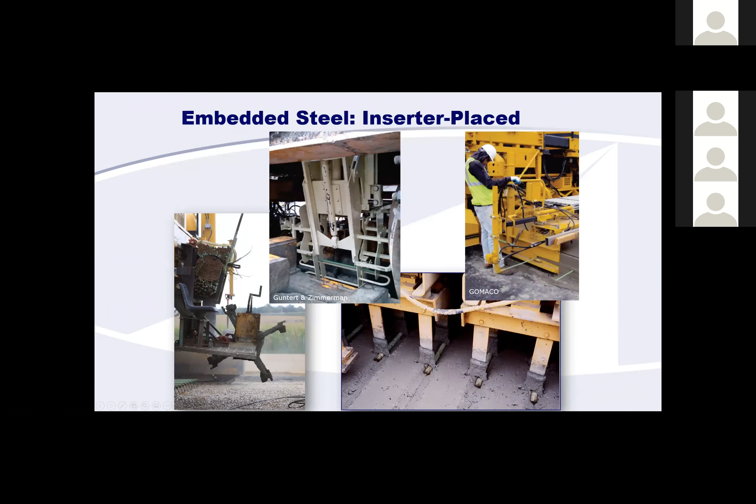And this is one that is kind of a rotational thing. You can see the bars in a magazine here, and it picks up the bar and rotates it down, and on a particular spacing, drops them into the pavement. Again, if you have someone sitting here placing those into the wheels, you would make sure that at the appropriate times you would leave one out as you're getting too close to that dowel basket.

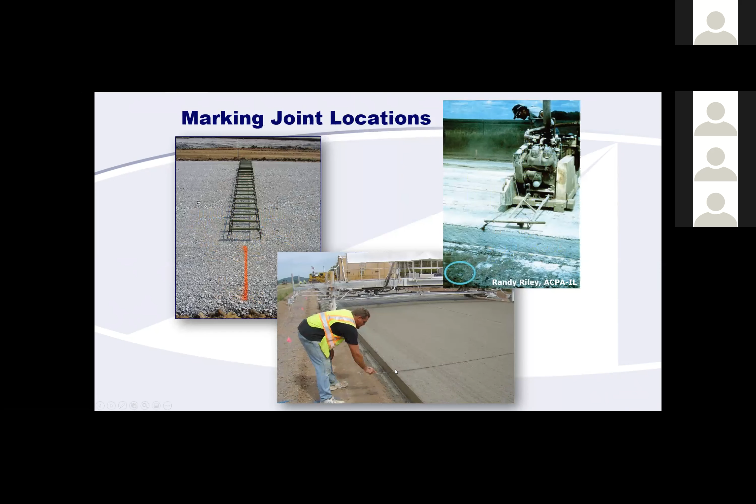No matter what you do, you've got to know where the dowel bars are, so that sawing is done at the right location. That should be fairly easily done with pre-placed steel. Once the dowel bar basket is in place, simply place a wide paint mark or a nail and washer out to the side, like in the top right photo, so that after the pavement is placed those points are easily identified, and a straight line can be pulled across and marked into the surface with a chain drag, or used as sighting points for the saw operator.

In terms of sawing the joint, we need to do it in a timely fashion. If we get on there too early, we see raveling of the joints. And if we get on too late, we may see uncontrolled cracking. So there's a time window in between.

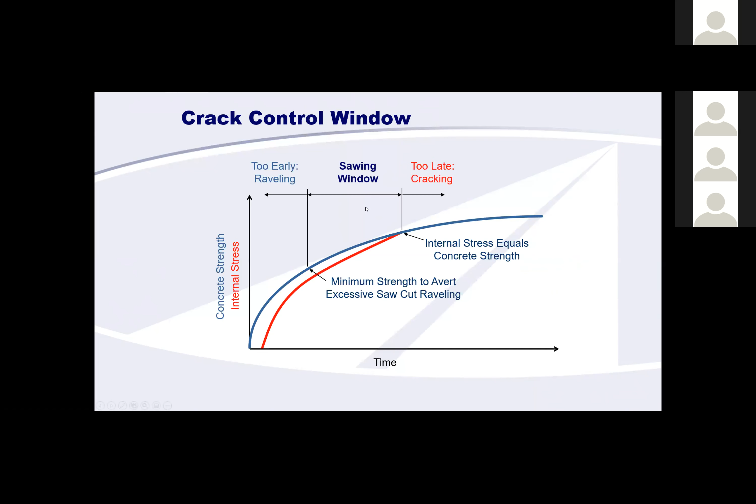Unfortunately, that window varies with a lot of different factors. If we have changes in the weather, sudden temperature drops can result in very rapid cooling and shrinkage at the top, which can cause a crack to form. Or sudden temperature rises can cause the pavement to dry very rapidly, resulting in plastic shrinkage cracking. High winds, low humidity, same sorts of thing. Subgrade or subbase type matters too - if you've got a lot of friction, that increases the rate at which these stresses develop.

That will reduce the amount of time available for sawing your joints. Stabilized subbases give you higher friction or interlock as well. Different mixture types matter too - whether it's a high water demand mix with a lot of recycled aggregate, for example, or if it's a rapid early strength mix with a lot of hot cement. All these different factors can influence the sawing window.

Again, there is a tech brief on this. ACPA has a tech brief called Early Cracking of Concrete Pavement: Causes and Repairs, again available free from your local chapter, from FCPA, and from ACPA National. There's also the Integrated Materials and Construction Practices for Concrete Pavement put out by the CP Tech Center, and I've got a source for that coming up in one of the later slides.

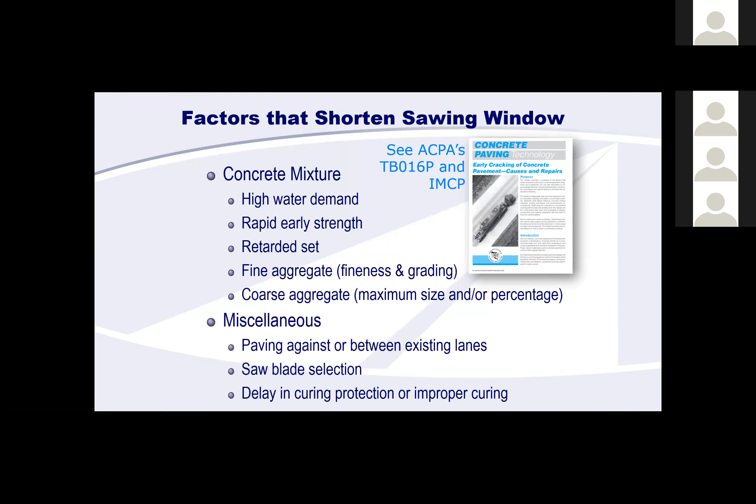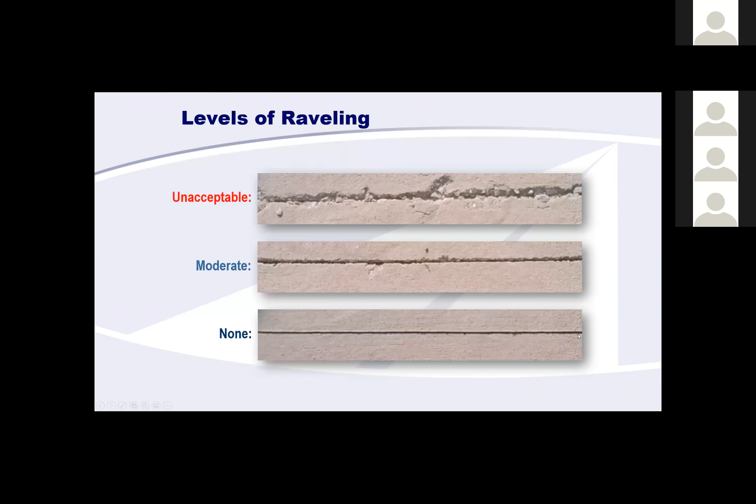Illustrations of what you can get: too early, you get a lot of raveling. Too late, unfortunately, too late looks just like really good - and you may not know that it's too late until it's too late. But you can get guidance on what that window is by using a program called HyperPave, again available free of charge for download.

It's developed by Transtec Group under a contract with Federal Highway Administration. The software is free - you can get it at hyperpave.com, or it's also available on the apps.acpa.org website.

And again, you may not know that it's too late. When you cut that, it looks like a good joint, but after the fact you may find that you have a meandering crack that wanders along, very often off the ends of the tie bars, indicating that it was not able to open on time, or that the depth of the cut was insufficient.

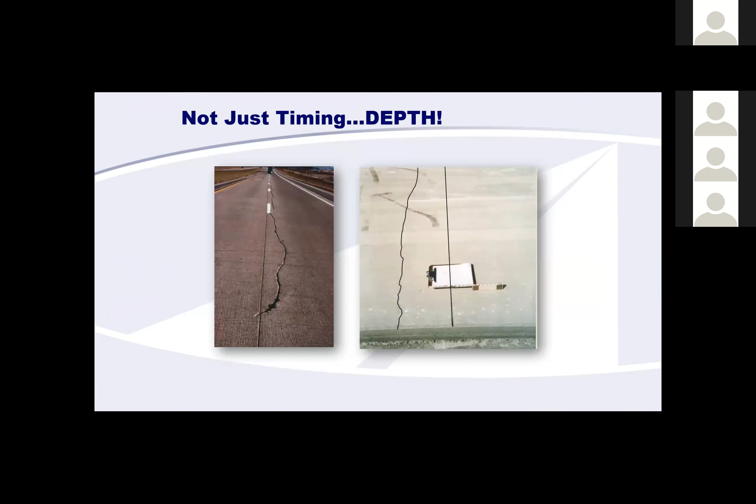Because when we put tie bars across the joint, we are reinforcing that joint. So we have to make sure we cut the joint deeply enough that that location is still the weakest plane in the concrete panel, even though there are reinforcing bars crossing it. This is why we need deeper saw cuts in our longitudinal joints.

Typically, a minimum of 1/3 the slab thickness - you don't want to get down and nick the bars, but you need to be at least 1/3 the slab thickness. For transverse joints, a minimum of 1/4 the slab thickness if we're on a granular base, and again a minimum of 1/3 the slab thickness to control it when we're on a stabilized base.

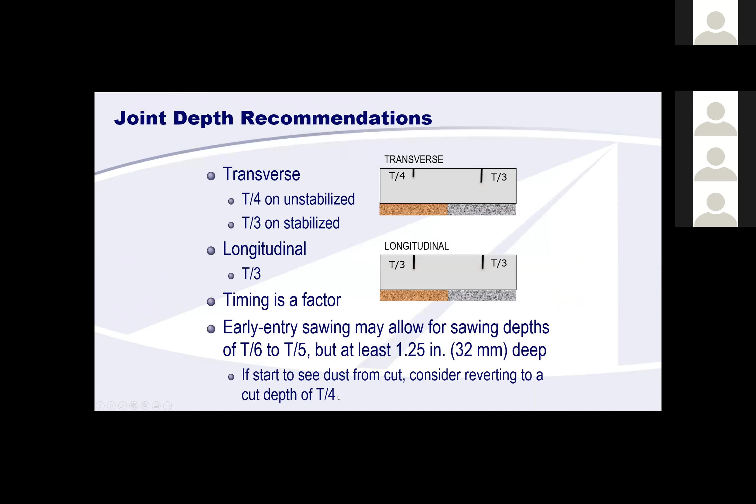We may get by with thinner saw cuts if using an early entry saw - might be as little as 1.25 inches in depth. But if you start to see dust coming out of it, suggesting the slab has dried out, you might want to revert back to a saw cut depth of T/4. If we do it right, with the right location, the right time, and the right depth, the joint will activate at the right location over the centers of the dowel bars.